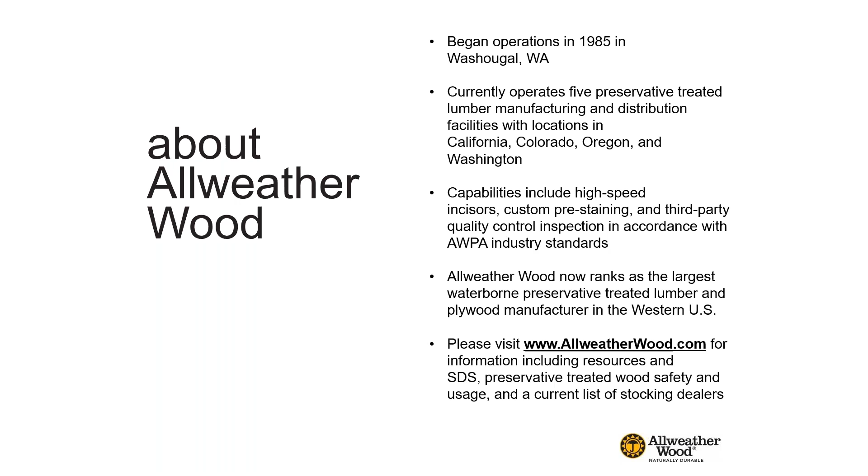Presentation description: what we're dealing with today is where wood is exposed to moisture, insects, fungal organisms, and where preservative treated wood can help ensure durability. By the time you complete this presentation, you should be able to specify preservative treated wood products using the American Wood Protection Use Category System, apply best management practices (BMPs) for preservative treated wood in aquatic and sensitive environmental areas, and get answers to commonly asked questions.

AWPA use category. So what is the AWPA? The AWPA is the American Wood Protection Association. It was founded in 1904.

It writes the standards for wood preserving for the United States. It provides technical forum for the industry. It does research and deals with end users. It's referenced in all building codes, and it's updated annually.

The AWPA's role is to determine if a preservative is effective and can be listed in the standards. It also establishes how much preservative is needed retention-wise, depending on the exposure and use. Industry is seeking to always minimize chemical use through lower retentions.

AWPA use categories: the AWPA use category system is based on the end use biodeterioration hazard zones, and there are 5 of them, for expected performance. These categories range from weather-protected UC1 mild, which is the lowest risk, to the highest risk, which is saltwater, marine, immersion, that would be UC5C. There's also a separate use category for fire retardants.

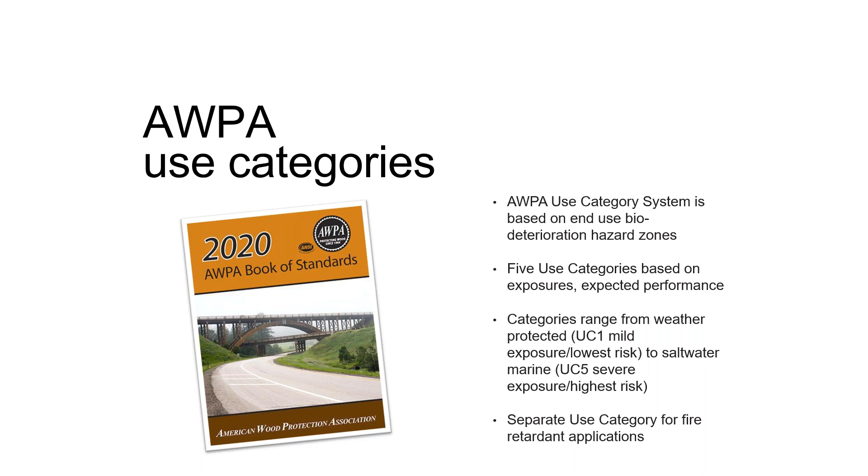Converting the AWPA use category from the old commodity C standards: the C standards were the chief specifications that we used in preservative treated wood for many decades. These standards are still specified by many people today, and although they technically no longer exist, we needed to publish a conversion sheet through WWPI that lets you cross-reference the old C standards with the current AWPA use category system and vice versa. This cross-reference publication is helpful for specifiers, project managers, and building code officials.

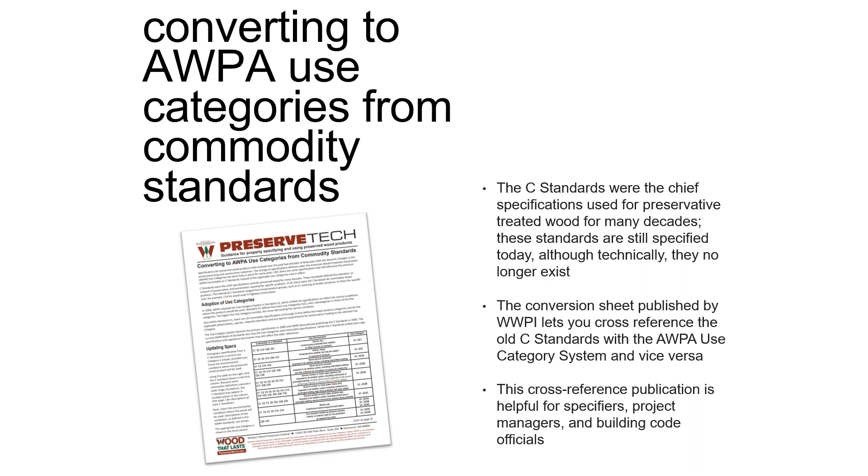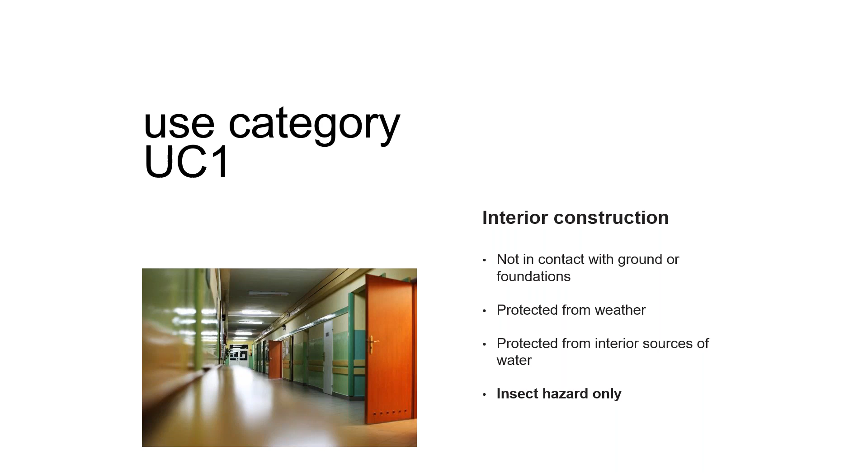UC2 category: again, that's an interior construction category, not in contact with the ground, protected from the weather, subject to dampness and occasional sources of water. Typical uses for this application include mudsill studs, headers, blocking, and interior walls. Today's typical mudsill application we see in the market is typically borate treated wood.

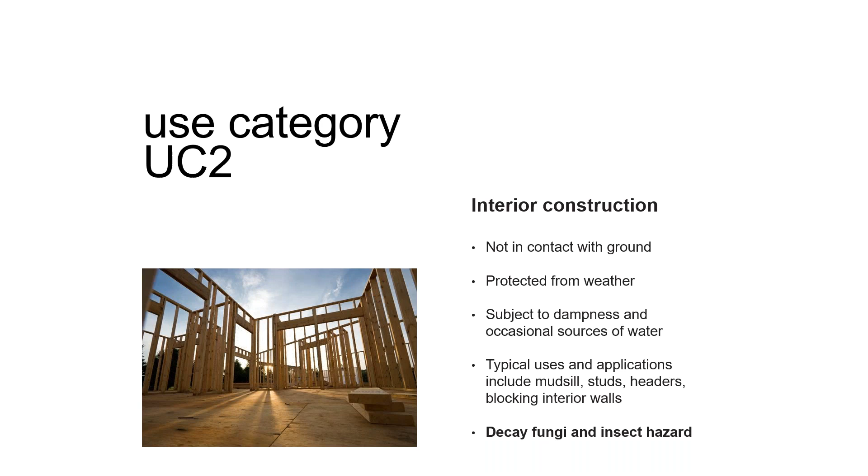UC category 3A and 3B. This is an above ground exposed-to-the-weather application. UC 3A would be coated and rapid runoff; examples would be fascia, coated millworks, and trims. UC 3B would be uncoated or poor runoff; examples are decking, railing, beams, and joists. Again, a higher fungi and insect hazard and decay zone.

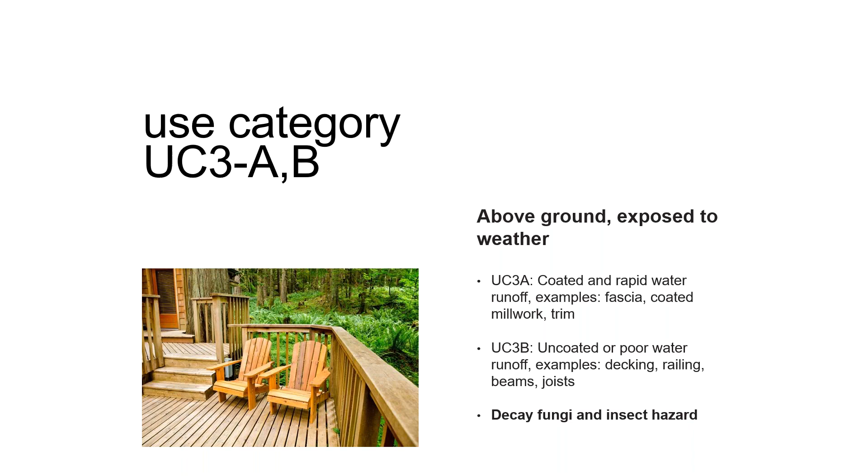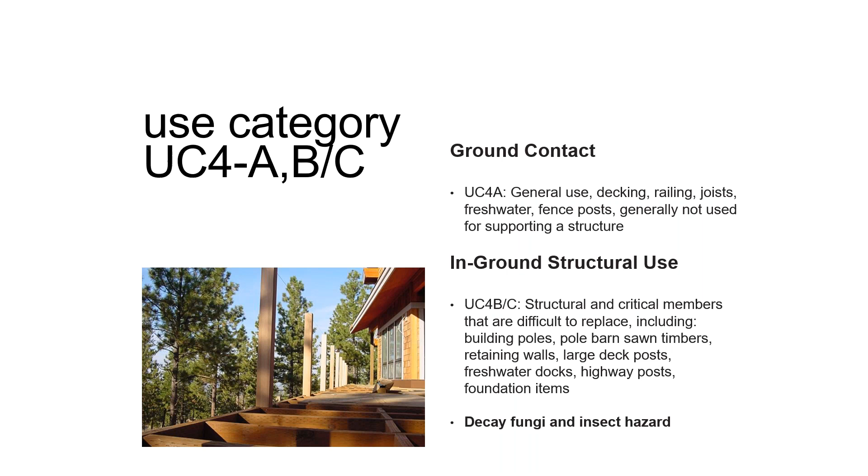UC 4A, B, and C. This is our most common category we have in treated wood. Ground contact would be your general use construction, which means it could be decking, railing, joists. It could be freshwater docks, fence posts, generally material not supporting a structure. UC 4B and C would be structural and critical members that are difficult to replace, including building poles, pole barn sawn timbers, retaining walls, large deck posts, freshwater docks, highway posts, etc. Foundation - this would be more of an extreme contact zone.

UC 5A, B, and C. This is the most severe application, and this is generally always used in marine applications, which would be saltwater applications. Examples would be docks, pilings, dolphins, moorings, etc.

There's two categories, basically. UC 5A is northern waters, which has a designation of a 1.5 pounds per cubic foot retention level, and UC 5B and C, which are generally southern waters, warmer climates, and that also includes salt and brackish water immersion. Waterborne preservatives ACZA and CCA are the only preservatives approved under AWPA for these retention levels. They typically require BMPs, best management practices, as part of their process.